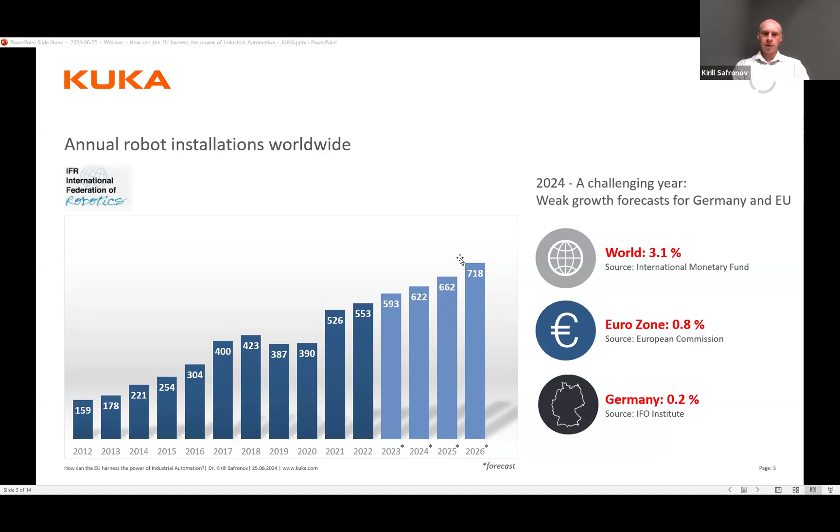According to the International Federation of Robotics, we have 5 trends: AI and machine learning, cobots in new applications, mobile manipulators, digital twin, and humanoids. Some of these trends are not new, but recently we've done quite a lot in these areas. I will present these trends in more detail.

In manufacturing and automation, we have several applications which are quite standard, but we don't have a final solution which is feasible in every case. For example, bin picking, when we have to grasp an object and recognize it. Recent AI and machine learning technologies can help increase the performance of these applications. For example, AI-based perception, which can speed up object detection, or AI-based grasping, which can increase the probability of successful grasps.

Predictive maintenance is quite important to save downtime costs in manufacturing. So all these technologies can just enhance the existing applications.

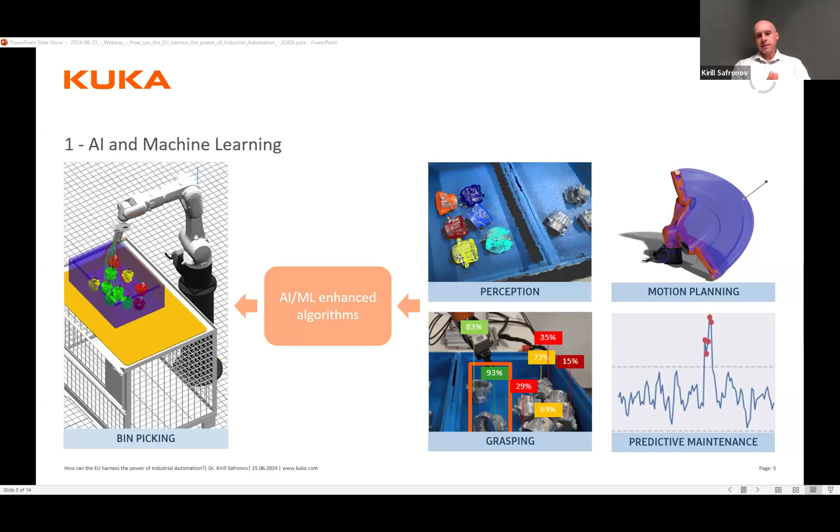There is also another group of technologies which change the automation paradigm, like easy-to-use concepts such as learning from demonstration, or generative AI. I would name task-based programming or copilots. In this case, we don't need robot experts anymore, and a normal user can use natural language to control and program the robot. So in general, it speeds up the commissioning time.

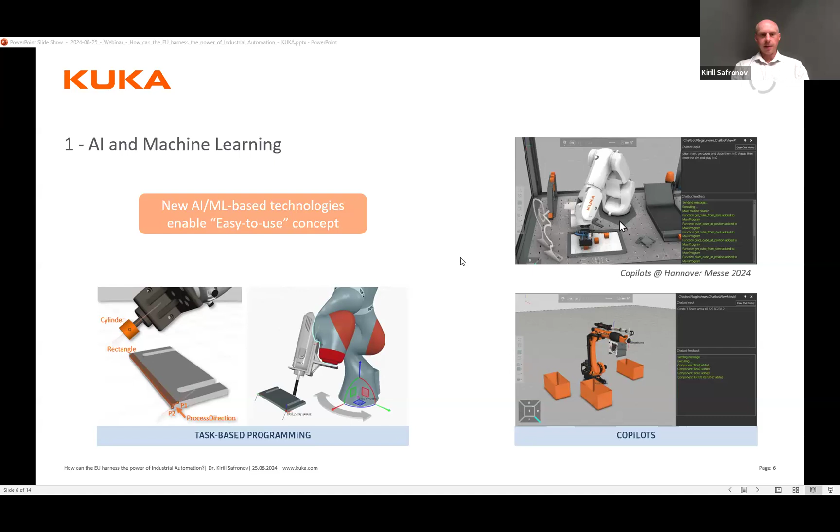As I said, cobots are still a trending direction. And we are not talking only about cobots as robots which cannot hurt the human, but also cobots which can help and support human workers. They're quite flexible. There are still some challenges like speed limitations or payload constraints.

One of the challenging tasks is to program the robot for a changing environment, not just teaching the robot to go from one frame to another, but also adapting to changes if the environment changes. Recent technologies like AI can help in this case.

We're talking about learning from demonstration, when the human imitates or demonstrates some process using hand guiding, like in these pictures, and the robot can learn the trajectory. Then if the environment changes, as you can see in the pictures on the bottom right, if the goal changes, we don't have to reprogram the robot—it can adapt to these changes. This also helps speed up the process of setting up the cell.

It also reduces the barrier to entry for using robots in small and medium-sized enterprises. To repeat again, we don't need a robot expert in this case—we need just, let's say, a powerful user.

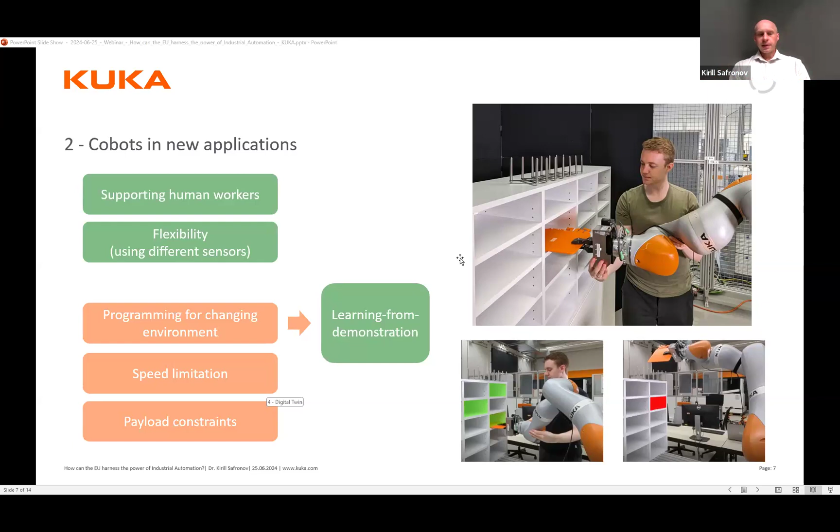Mobile manipulators can bring a lot for automation in warehouses and factories. They can reduce costs, so we need fewer fixed workstations. They're quite flexible, using a lot of different sensors like vision sensors, ultrasound, and so on. They can also support humans.

But we have some challenges, like safety. Mobile robots are not so fast, so if we increase the speed, we have to think about enhanced safety for human-robot collaboration.

Another emerging market in mobile manipulators is outdoor robotics, and here we have a lot of challenges. The big challenge is environmental conditions. For example, outside we have different lighting, sunlight, shadows, and so on. Temperature changes, humidity, unstructured and unknown environment—it's dynamic. If we can solve these challenges, it will be very good for automation in general.

The use of digital twin, as the fourth trend, has tremendous potential. To speed up the process of setting up the robot cell, we don't need any physical interaction anymore—we can do everything in simulation.

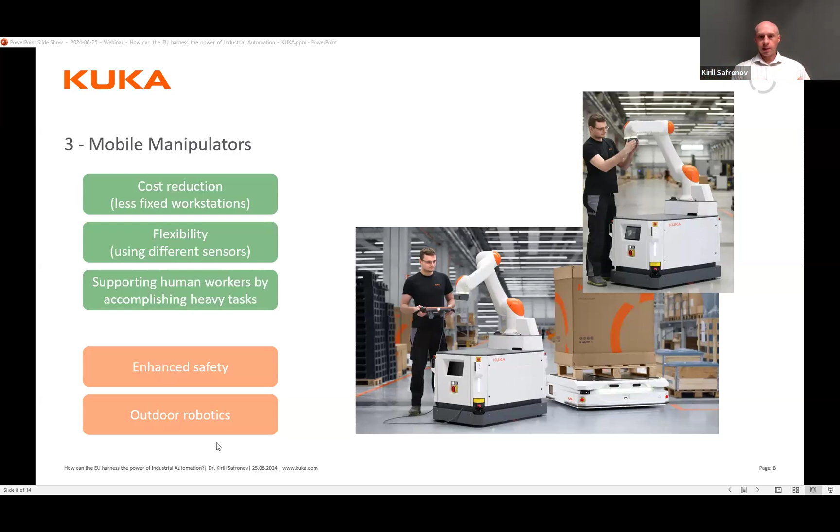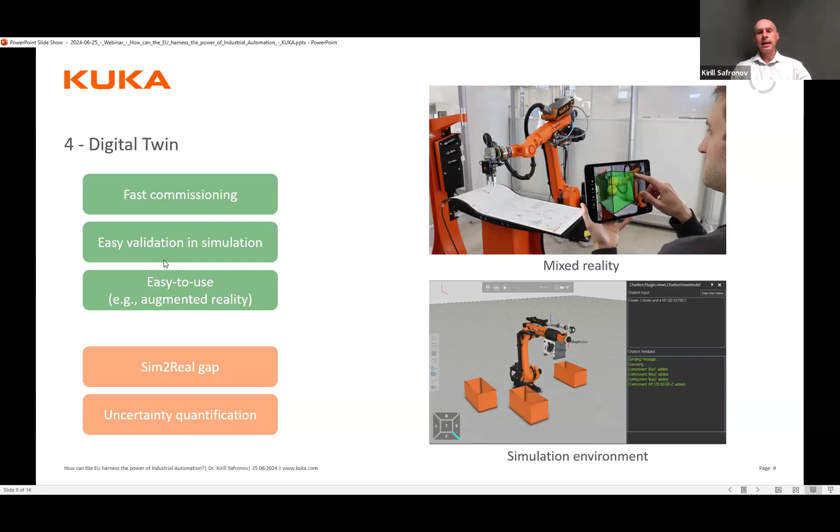So I presented shortly these 5 robotics trends as an example. Sorry, I didn't show you - it will be shared in any case in the end. So, digital twin - sorry I didn't show you shortly about the digital twin. You see on these pictures the mixed reality, the simulation environment I was talking about, the tablet, and so on. So, humanoid robots.

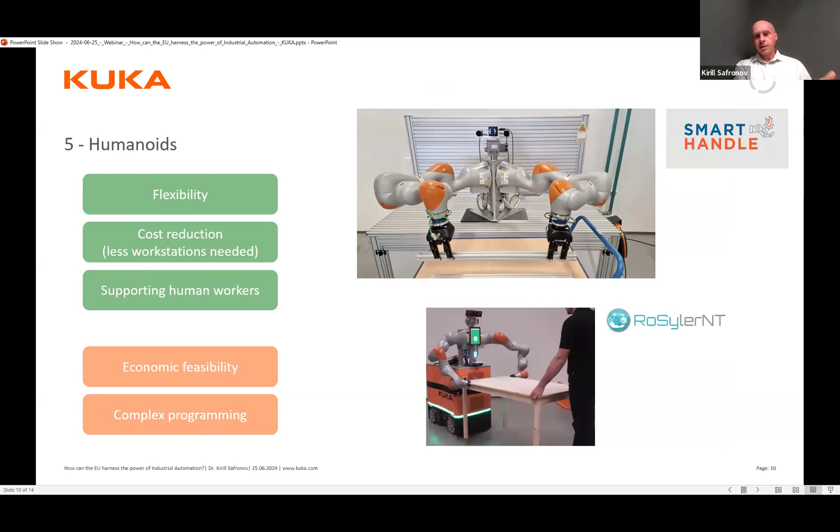Some examples of research projects: Smart Handle, a European project about dual arm manipulation, and another project, a German project where the robot was helping to carry heavy objects together with a human. And weaknesses of AI - I already told you about it, sorry for repeating this.

So shortly about these 5 robotics trends - KUKA wants to concentrate on these robotic trends, tries to develop what is important, and we hope that all these trends can help to increase automation in manufacturing. Yes, thanks, that's all from my side.

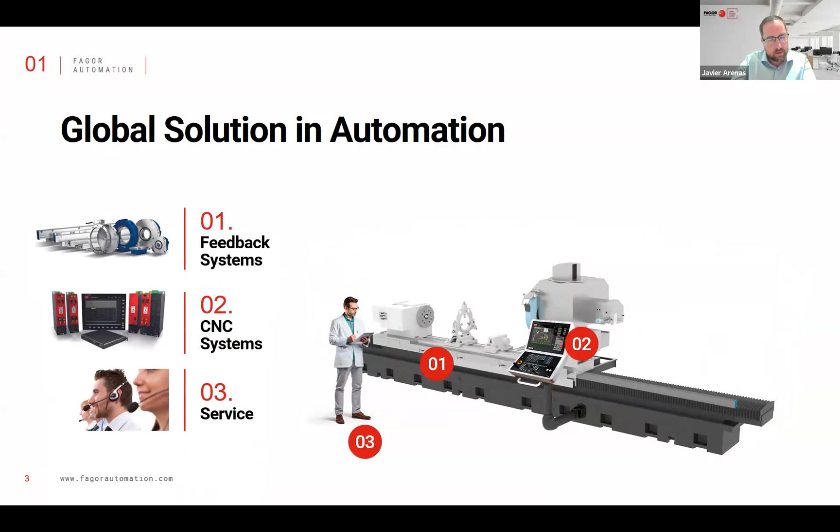As you may know, Fagor Automation is a Spanish company with more than 40 years of experience, and we provide a global solution in automation for machine tool builders. We have 3 different business areas. One is feedback systems - we design and manufacture linear and angular scales mainly for machine tools, but for many other applications too. Another important business for us is CNC systems, where we provide a full package to automate the machine.

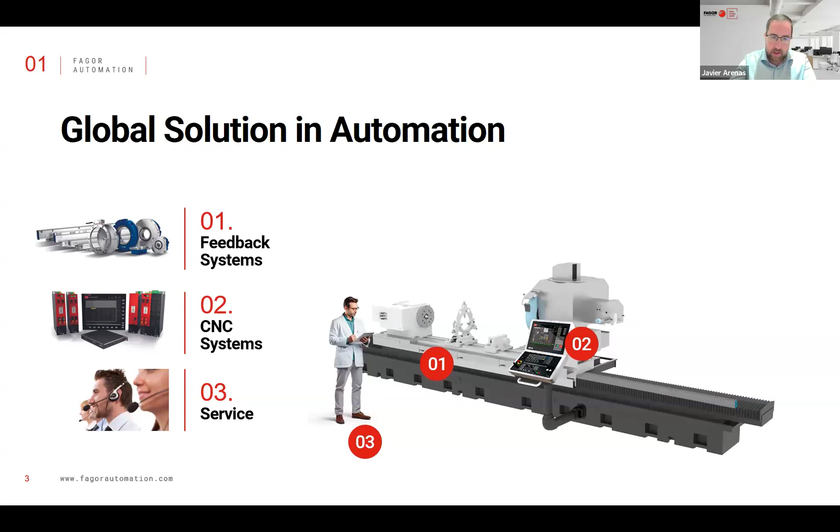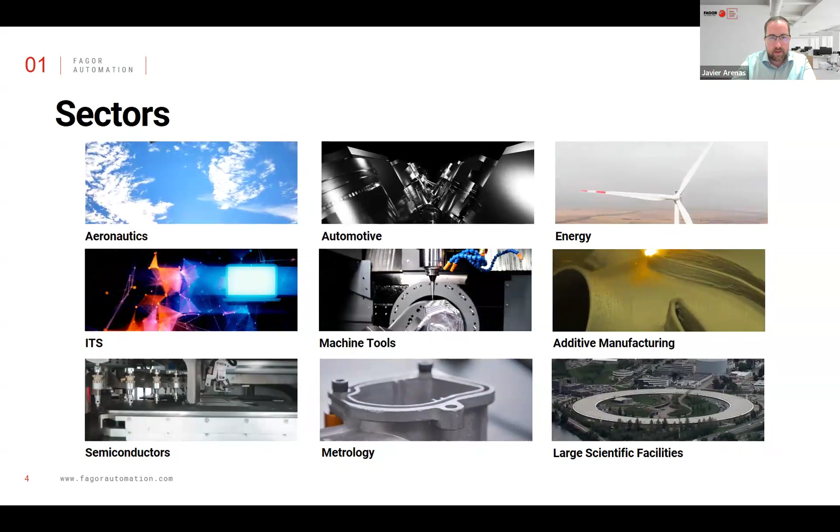We design the CNC, as I will mention later, the drives, the electrical motors - all the package needed for the machine tool builder. We also have another business we call service, where we provide digital solutions and many other services related to technical assistance. As a component provider, we have the advantage of many different clients with many different needs and requirements, and presence in many different sectors - aeronautics, energy, additive manufacturing, semiconductors, and scales used in large scientific facilities. So in my opinion, we have a very wide point of view about how automation is in the world, and specifically in Europe.

I will start by explaining 3 key strategies that I see as very important for companies to leverage the benefits of industrial automation. I will be short, but there are 3 key aspects that are very relevant. For a start, perhaps the first question is why automation? Here we have 3 rules that we have to take into account, and every company should agree and should follow.

The first one is that the first automated will always win through. We have learned this throughout the last years. Competition drives innovation, and innovation normally is made by automation, and the market never remains stable for long. That's something we know better than ever before, with competitors from USA, from China, others with the same technology as us, and we see how the market changes almost every day.

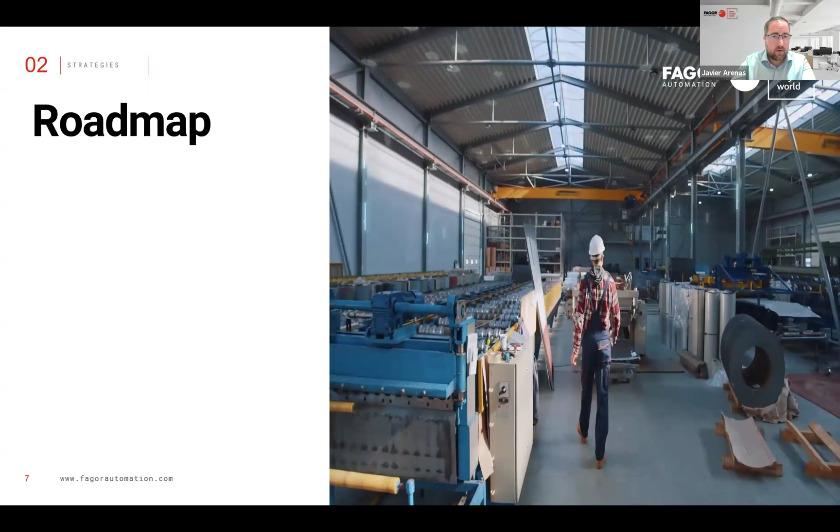With this scenario, the first remark I would like to make is that for the success of an automation project, the first thing is to have a roadmap. Perhaps it seems obvious, but a lot of companies lack it, and it's very important to have a strategy about the overall automation project. Companies shouldn't automate for the sake of automation. They should identify their processes, prioritize them, and see where automation can help them. That's key for the success of the automation. It's better to start small, perhaps as early as possible, but with a very clear roadmap for the future.

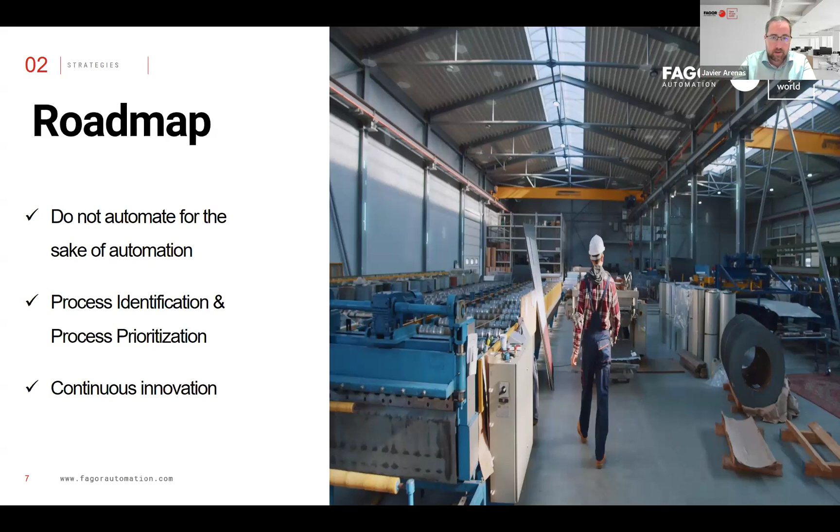Another key aspect is that companies need to stay nimble. The continuous innovation is important. It's key for continuous success in the future of the company.

Another key strategy is building collaborative ecosystems. In previous decades companies didn't need them, but now with evolution and new technologies, new ways of automation, usually companies have processes with a lot of knowledge on them, very cost-effective solutions. But now the new trends of automation involve many other technologies that, for most companies, are non-core technologies. They need the help of universities and technological centers, because otherwise it would be almost impossible for companies to adopt all these kinds of technologies.

I am sure everybody agrees that this kind of collaboration increases the pace of innovation. As I said before, it's important to start small, start with a practical project to test. Building a collaborative ecosystem is not just like changing a provider. It's more about understanding the needs, the requirements, even the market of the company, and that takes time. So from the perspective of a technological research center, we ask companies to start with a small project, but with a long-term vision.

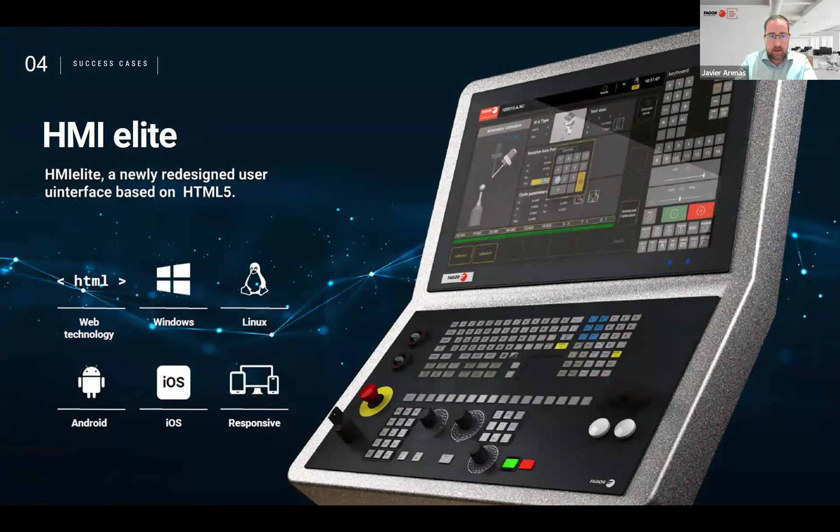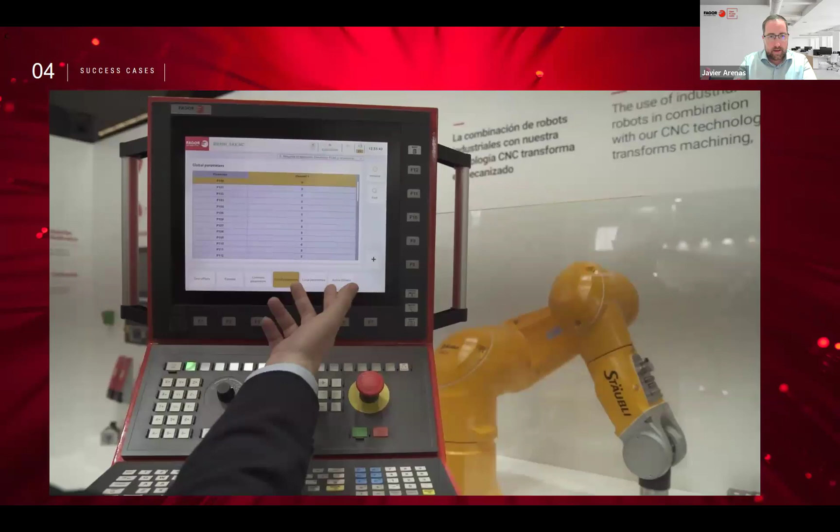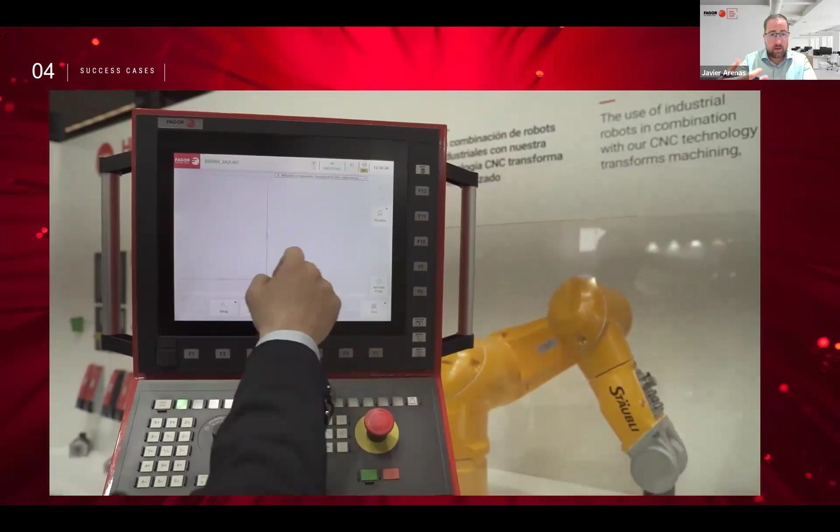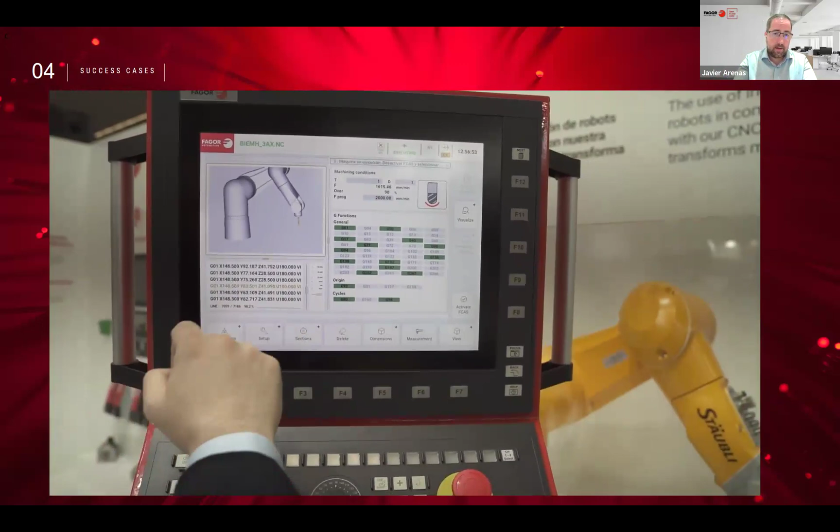It's a new HMI. I don't have time to explain it in detail, but here's a short video showing how we've changed the way we use an HMI. We've used web-based technology, bringing the technology of smartphones to the HMI. We haven't done that alone, we've done it in cooperation with universities and technical and research centers. For me, it's a good example of how we can customize a solution, providing the market with a product built on the latest technologies that's very well received.

As a conclusion, three final remarks. One, customization and flexibility: we have to adapt to the market and its customers. Industry 5.0: as I said, the human factor is a cornerstone of automation, and we need continuous innovation. We have to persistently improve processes and products. And that's all, thank you very much.

Hello everybody, thank you for giving me the opportunity to participate in this webinar. Can you see my screen here? Yes. Do you still see it? All right. Yes, we can. So before we talk about harnessing the power of... now we see it not full screen. You have to put it full screen. All right, full screen, let me check.

Do you see it full screen? Yes. Yeah, so before we talk, let me introduce what we do at GF, which will illustrate our approach to industrial automation.

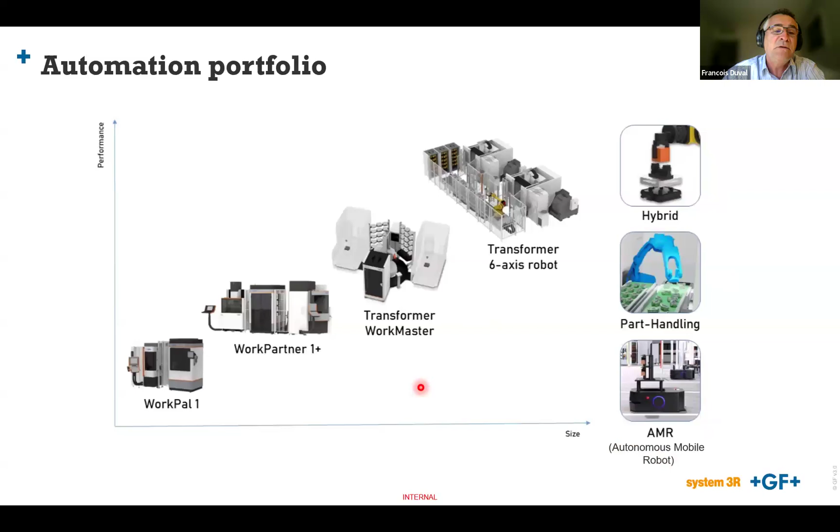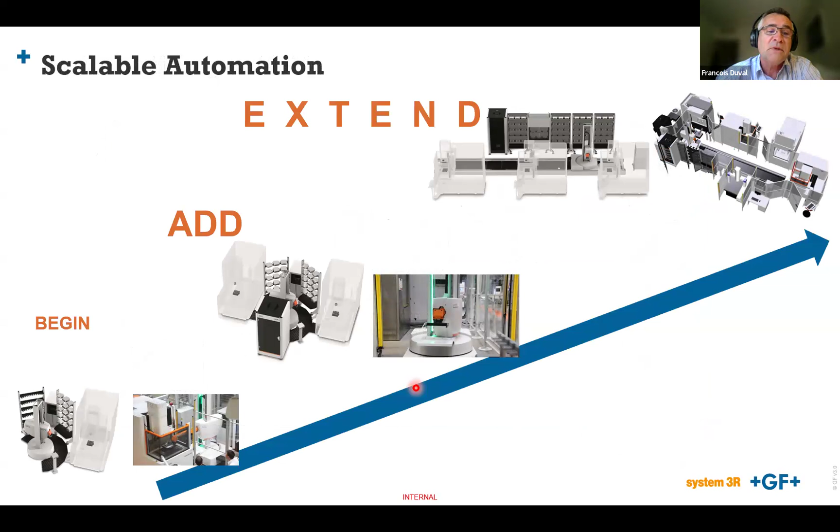Like many players in this market, we have a portfolio of equipment, from what I'd say our design or integrating 6-axis standard off-the-shelf robots, to pallet handling or part handling or hybrid, including also AMRs, which are developing quite well at the moment. Those equipment are designed to be scalable. For example, a customer may start with the automation of one machine, then add a second machine, and at the end extend it to the full production line of a part. The ultimate goal being a fully automated production line, as we do for the dies and mold industry or for the aerospace industry in particular. But this is mainly hardware.

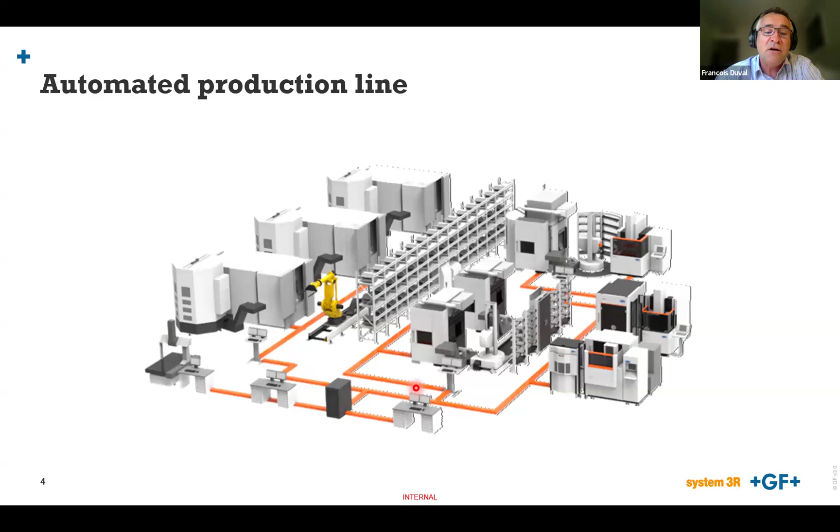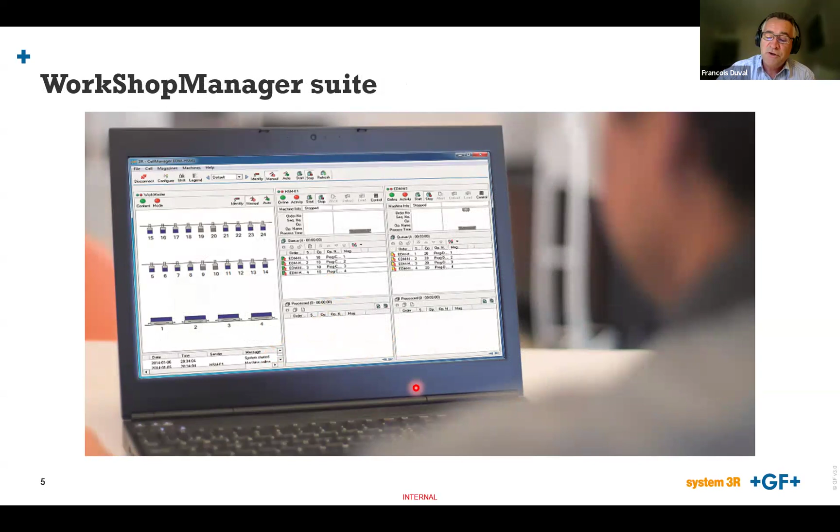Hardware goes along with software. So if you want to provide automation, it's pretty obvious that you need to also put in place what we call the WorkShopManager in our portfolio, which enables you to prepare the jobs, execute the jobs with many options, and particularly also to monitor the jobs with our WorkCenter and CellManager software suite.

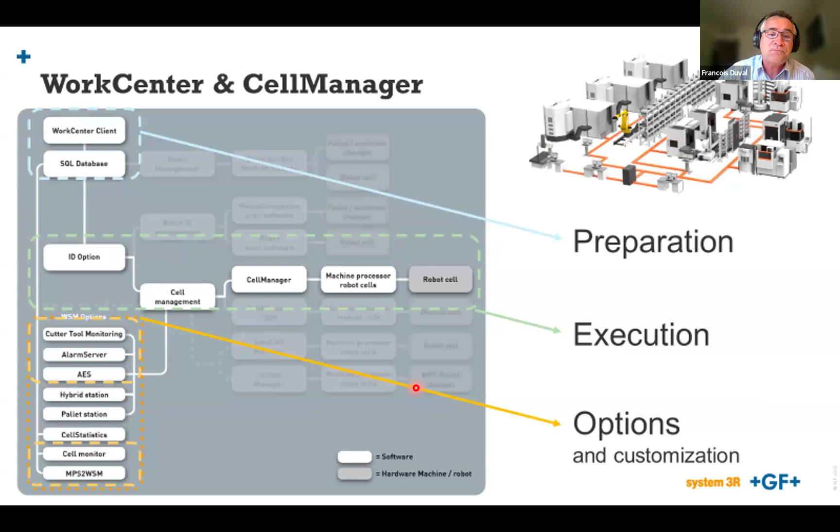But let me come back to the basics. I would say automation is about, of course, maximizing the uptime of a machine. The advantage of automation is pretty obvious: you have production time available 24/7. Very often at customer premises, we see that the scheduled time is much lower, and sometimes excluded entirely. Then you have to optimize your process by reducing availability losses, performance losses, and quality losses, and make the first part right. All those production losses are deducted from the planned production time.

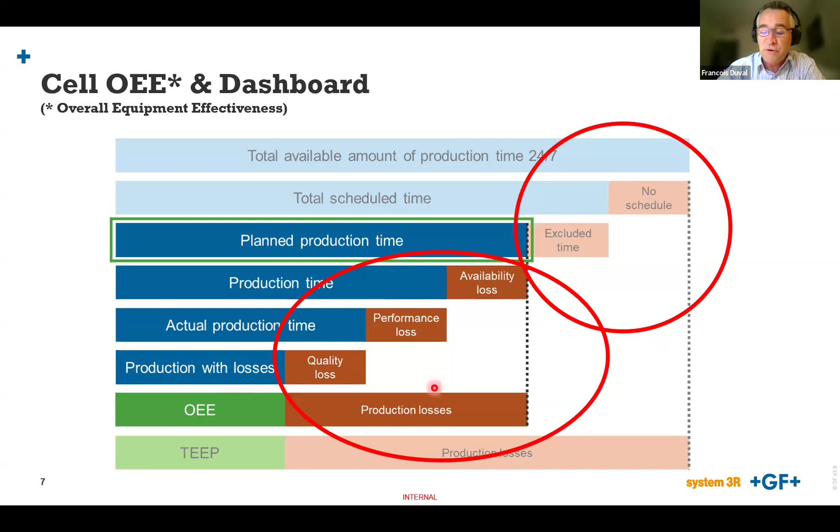One way to measure it is the overall equipment effectiveness, the OEE, which is what remains. As my customers usually say, I'm making money when my spindle is cutting, and the rest of the time is purely lost. So we try to act on those two main areas: one, through automation, to increase the planned production time, and to also monitor, identify, and address all production losses. This OEE monitoring makes the losses measurable, makes it easier to find equipment and process weaknesses and bottlenecks, and fairly attributes responsibility for where the unproductivity is lying. This enables us to perform corrective action, increase productivity, and produce smarter and greener.

What are the consequences for our workforce?

We are the OEMs. On our side, it has an influence on our sales and application team. They move from equipment sale to solution sale. They have to make flow simulation, to have an open discussion about the cost, the benefits, and the return on investment for our customers. So typically, that's really a value selling approach.

We need also to train our service engineers and application engineers, not only on the equipment, but also on software. And if your promise is to increase the production time, then you have to move for 24/7 online support as well. It comes along with our suite of software called my rConnect, which enables us to support the customer with the follow the sun rule.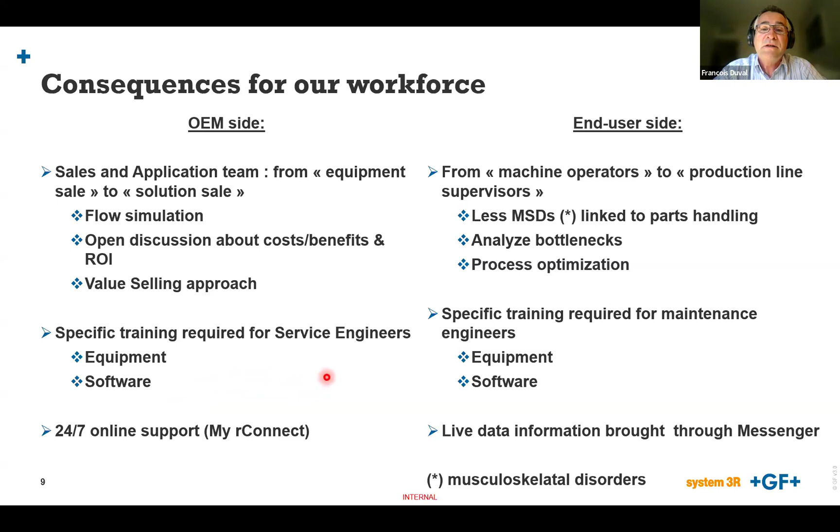So I've talked a lot about education. We have created the GF Academy, which brings a portfolio of trainings for operators, for maintenance people, for application engineers, and also on the field consulting services.

We do believe that the training of all the stakeholders is crucial. This is a revolution. But we don't believe that this is only a matter of skills. And as you can see, our 70-20-10 model is applied at the GF Academy.

10% of the time is purely formal training. But then after, it's social and mainly experiential on the field. Learning by doing is our rule. And as I said, it's not only a matter of knowledge and skills, but also of behavior and attitude.

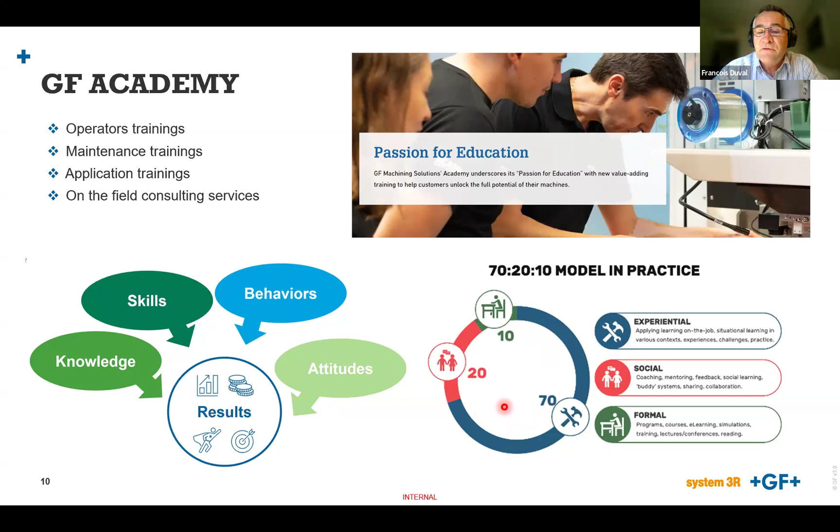I mean, there is a challenge on the human resources. It's hard to find automation engineers, so we have to promote academic and vocational training to bring more workforce on the market, because the needs there are tremendous.

But I think that the main challenge of our customers when listening to them is how do I upskill my existing operators and my maintenance teams? And here, this is an investment which is on top of the capital expenditure, quite high for our customers. I think that funds for upskilling of the existing workforce would really be beneficial to our customers.

Then there is also the question of reallocation of tasks for the lowest qualified people. There is very often a basic idea on the market that robots are killing jobs. I can tell you from experience that I've never seen companies that were laying off people because they were moving to automation. They have to reallocate the task, but the most successful are the ones which are maximizing their production time for obvious return on investment questions.

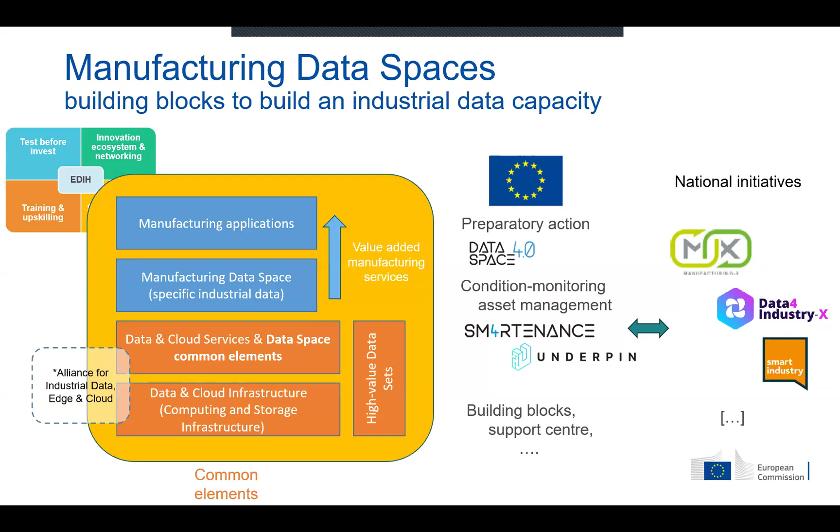Sorry, can you? Yes, we have one minute left. Very good, thank you, okay.

I will skip this one that comes to the opportunities and challenges of manufacturing as a service, but that is even more future-proof, and we have a foresight project to look into this. That resonates a lot with the change of CapEx to OpEx and the front loading of investment that François mentioned before.

One of the things I would like to draw your attention to is we have created a network of European Digital Innovation Hubs. They are everywhere in Europe. They help companies to make the digital journey. As a machine manufacturer, make yourself known to the EDIHs. They can help manufacturing companies do the best with your equipment. They are really there to support the local ecosystem. I was in Hannover Messe with a number of EDIHs, and we have seen how this has really resonated with the audience. They are also there to help on the reskilling and upskilling part.